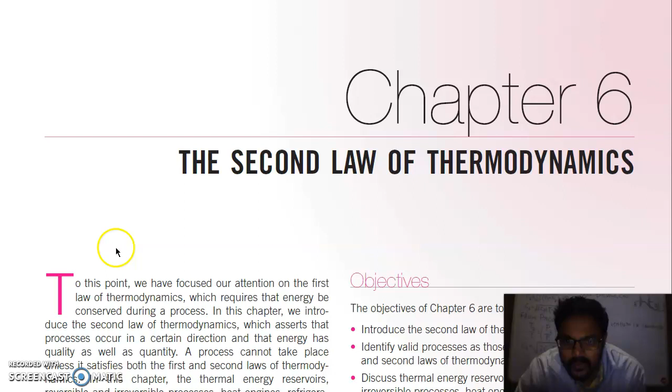The second law of thermodynamics, the Carnot principle of the second law of thermodynamics, puts limits on the operation of cyclic devices, as expressed by the Kelvin-Planck and Clausius statements. A heat engine cannot operate by exchanging heat with a single reservoir, and a refrigerator cannot operate without a net energy input from an external source.

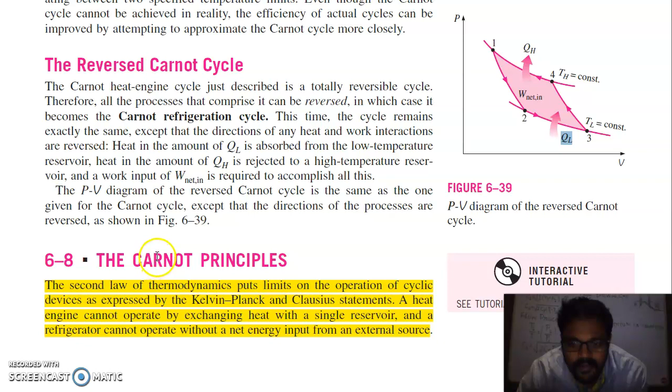We can draw valuable conclusions from these statements. Two conclusions pertain to the thermal efficiency of reversible and irreversible heat engines, and they are known as the Carnot principles. The Carnot principles are mentioned in the figure here.

So one process is irreversible, two processes are reversible, three processes are reversible, and according to these three processes, their respective thermal efficiencies are: thermal efficiency 1, thermal efficiency 2, thermal efficiency 3.

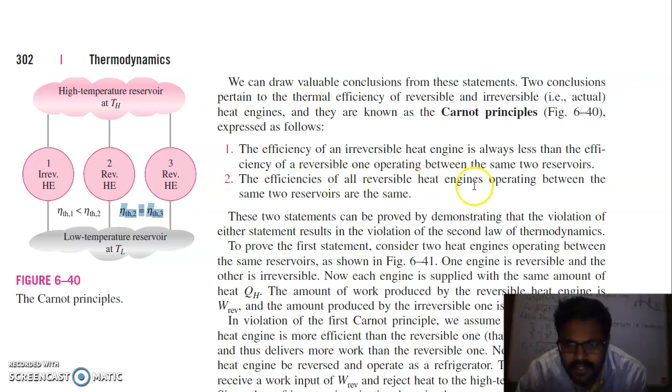Efficiency 1 means irreversible efficiency is always less than reversible efficiency, while if both 2 and 3 are reversible, their efficiency must be equal. The efficiency of an irreversible heat engine is always less than the efficiency of a reversible one operating between the same temperature limits. The efficiencies of all reversible heat engines operating between the same two reservoirs are the same.

These two statements can be proved by demonstrating that violation of either statement results in violation of the second law of thermodynamics. Now let us take the reverse of this.

We assume that the irreversible heat engine has more efficiency than the reversible heat engine. We assume, in violation of the first Carnot principle, that the irreversible heat engine is more efficient than the reversible one, and thus delivers more work than the reversible one.

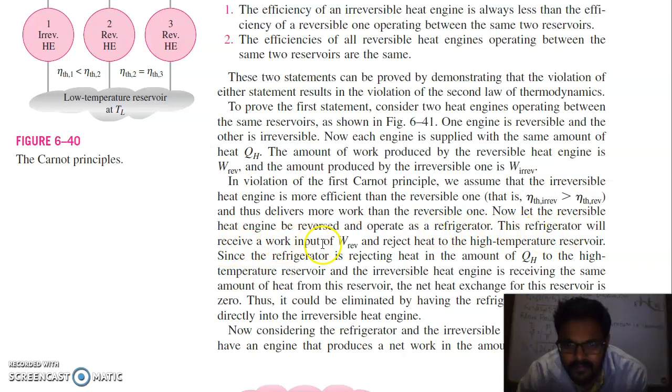Now let the reversible heat engine be reversed and operate as a refrigerator. This refrigerator will receive a work input of W reversible and reject heat to the high temperature reservoir.

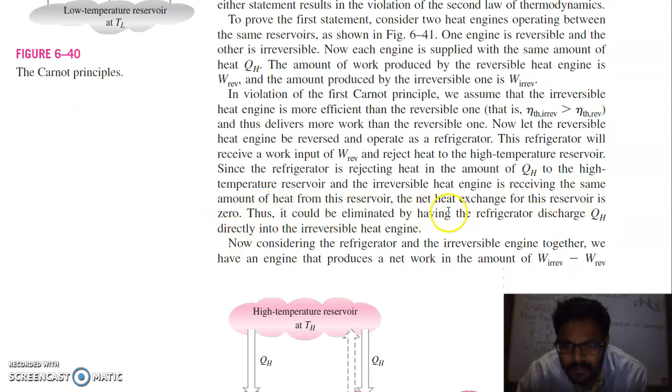Since the refrigerator is rejecting heat in the amount of QH to the high temperature reservoir, and the irreversible heat engine is receiving the same amount of heat from that reservoir, the net heat exchange for this reservoir is zero. Thus it could be eliminated by having the refrigerator discharge QH directly into the irreversible heat engine.

So what he is saying here is that we had a reversible and an irreversible heat engine operating between the same reservoirs. So we have a high temperature source and a low temperature source.

A reversible... an irreversible heat engine is operating whose work is W irreversible. It will lose QL irreversible amount of heat to the low reservoir.

Now we can take another heat engine, a reversible heat engine, which will take QH amount of heat. It will produce W reversible amount of work and it will reject QL to the reservoir.

So because it is a reversible heat engine, it can be reversed. So when this is reversed, it will act as a refrigerator.

It will take QL amount of heat from the reservoir and it will reject QH amount of heat to the high temperature reservoir. So it means now...

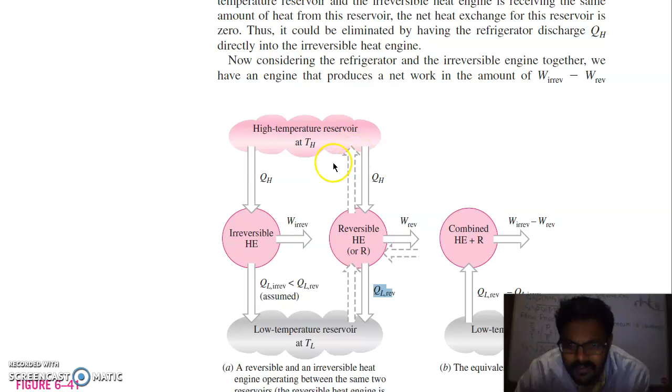Considering the refrigerator and irreversible engine together, we have an engine that produces a net work in the amount of W irreversible minus W reversible. This means you can combine the irreversible heat engine with the reversible heat engine or refrigerator.

When you combine these two, you get a combined heat engine plus refrigerator, because the refrigerator is supplying QH amount of heat to the reservoir, and this reservoir is supplying QH amount of heat to the irreversible heat engine. So you can eliminate this reservoir, since QH is supplied back and QH is taken.

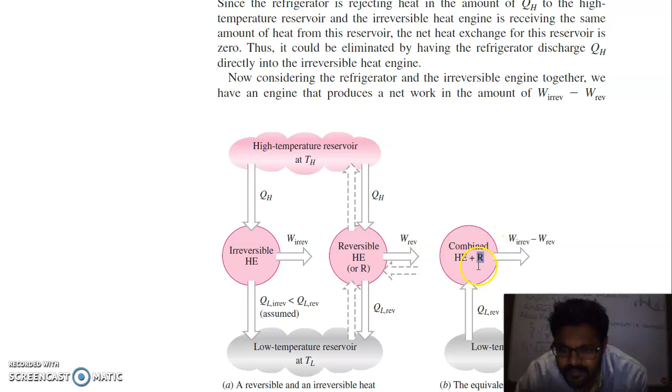So you can just eliminate it, since they can supply heat to each other. This refrigerator can supply this heat to the irreversible heat engine. So after combining the two, you get this combined heat engine plus refrigerator.

So after combining, you get this equation here: QL reversible minus QL irreversible, and W irreversible minus W reversible.

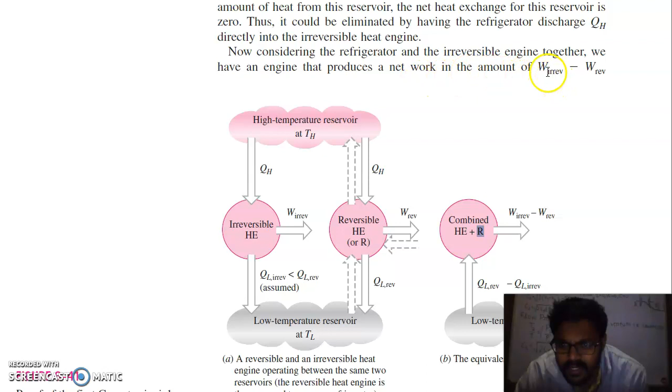Because we know, now considering the refrigerator and irreversible engine together, we have an engine that produces a net work in amount W irreversible minus W reversible while exchanging heat with a single reservoir, a violation of Kelvin-Planck statement of the second law.

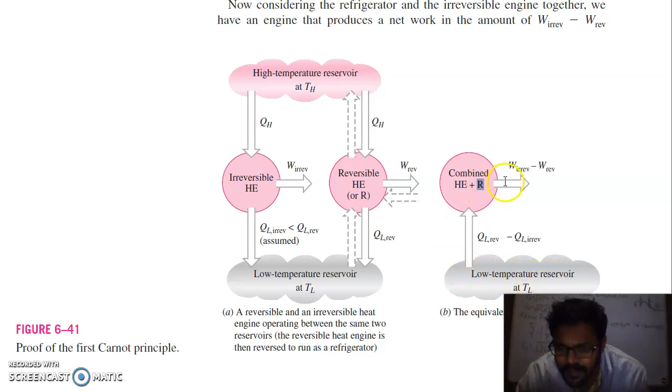This here is the violation of second law, meaning a refrigerator, this system is working just by taking heat from the low temperature reservoir and producing work. This is total violation of the Kelvin-Planck statement of second law.

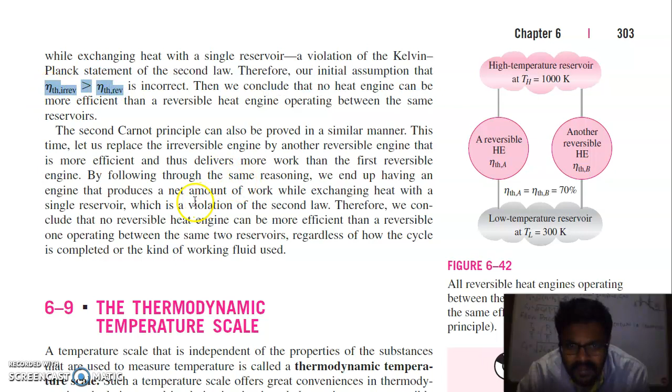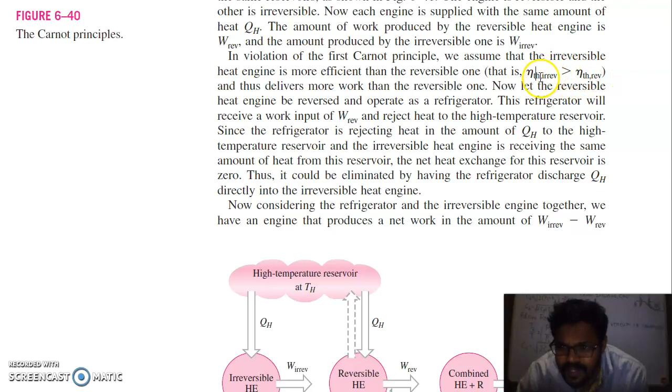Therefore our initial assumption that efficiency of irreversible is greater than efficiency of reversible is incorrect - this assumption which we had taken at the initial point is incorrect. If this is an incorrect assumption, it means the reverse of this is true, which means efficiency of a reversible engine is always greater than efficiency of an irreversible engine.

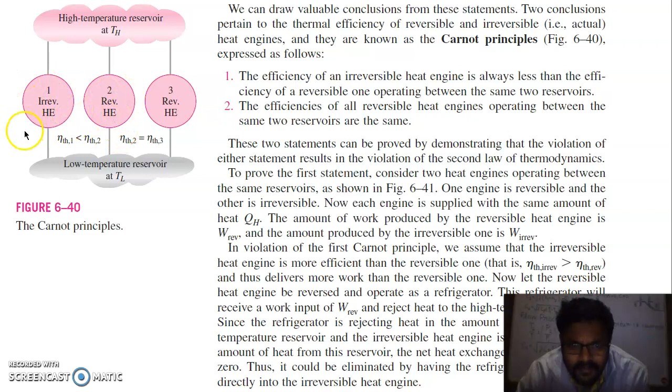This reversible engine has more efficiency as compared to an irreversible engine, and whatever efficiency is given by the reversible heat engine is the maximum efficiency you can obtain, meaning all reversible heat engines will have the same maximum amount of efficiency.

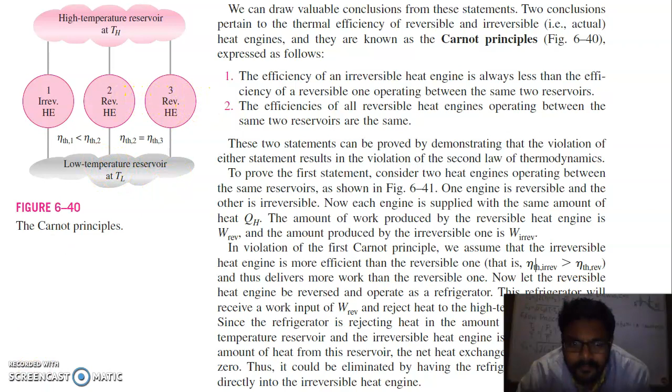Then we conclude that no heat engine can be more efficient than a reversible heat engine operating between the same reservoirs. The second Carnot principle can also be proved in a similar manner.

This time let us replace the irreversible engine with another reversible engine that is more efficient and thus delivers more work than the first reversible engine.

So you can see here we had two engines, a reversible heat engine and another reversible heat engine, and both have the same efficiency. All reversible heat engines operating between the same temperature reservoirs have the same efficiency.

By following the same reasoning, we end up having an engine that produces a net amount of work while exchanging heat with a single reservoir, which is a violation of the second law.

Therefore we conclude no reversible heat engine can be more efficient than a reversible one operating between the same temperature reservoirs, regardless of how the cycle is completed or the kind of working fluid used.

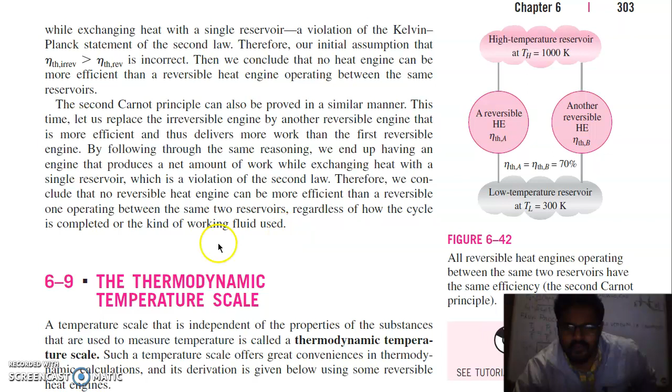The thermodynamic temperature scale is a temperature scale that is independent of the properties of the substance used to measure temperature.

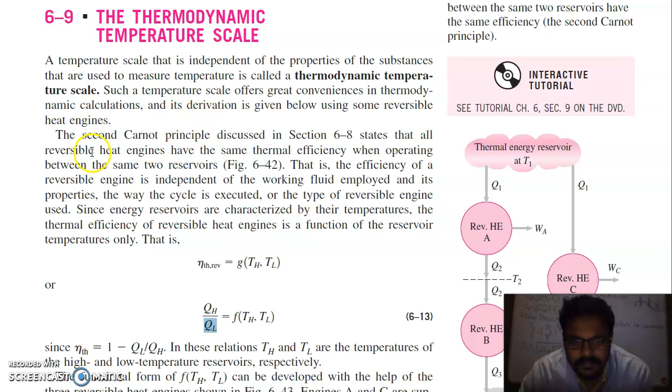Such a temperature scale offers great convenience in thermodynamic calculations. Its derivation is given below using some reversible heat engines.

The second Carnot principle discussed states that all reversible heat engines have the same thermal efficiency when operating between the same two reservoirs. That is, the efficiency of a reversible engine is independent of the working fluid employed and its properties, the way the cycle is executed, or the type of reversible engine used.

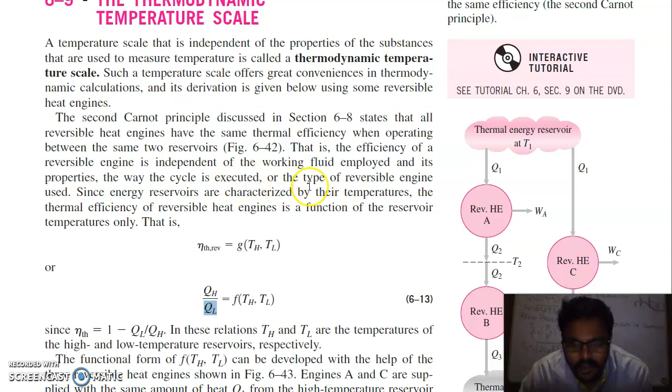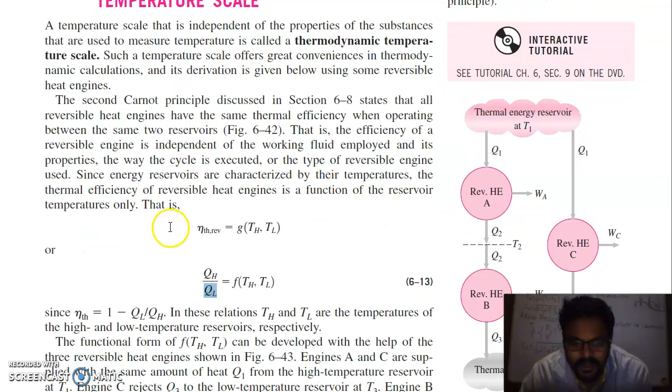Since energy reservoirs are characterized by their temperatures, the thermal efficiency of a reversible heat engine is a function of reservoir temperature only. So you can see here we have a thermal energy reservoir at temperature T1, and a thermal energy reservoir at low temperature T3. So we had two types of processes here, two types of heat engines.

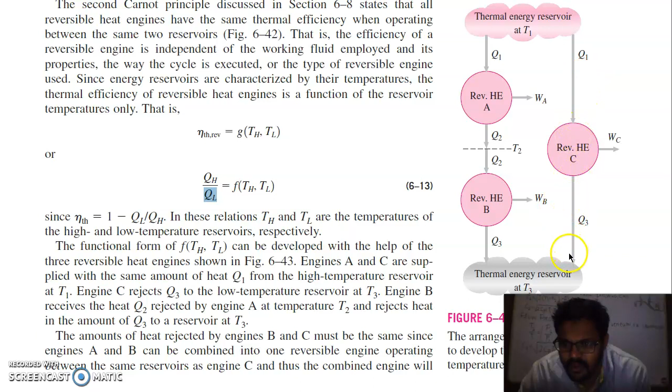One is taking Q1 heat, producing WA work, and rejecting Q2 heat, and then Q2 heat is supplied to engine B, which rejects Q3 heat. The second is a single engine which will take Q1 amount of heat and reject Q3 amount of heat, producing WC amount of work.

Now thermal efficiency is dependent on 1 minus lower temperature divided by higher temperature. In these relations, TH and TL are the temperatures of the high and low temperature reservoirs respectively. You can also say the efficiency is a function of higher temperature and lower temperature. So higher temperature and lower temperature, or QH and QL, is also a function of higher temperature and lower temperature.

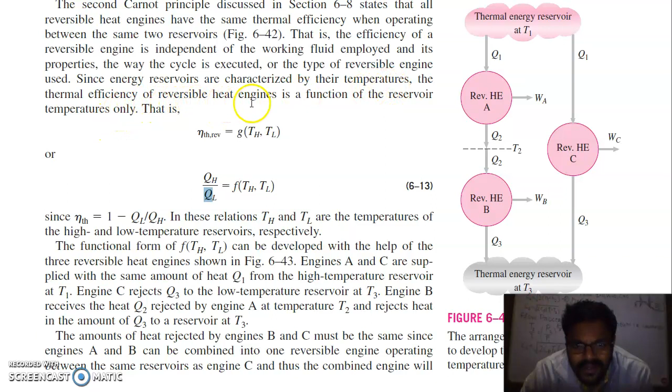So the efficiency of a reversible engine is independent of the working fluid employed and its properties, the way the cycle is executed, or the type of reversible engine used. Since energy reservoirs are characterized by their temperatures, the thermal efficiency of a reversible heat engine is a function of reservoir temperature only.

Now as we know this is a function of temperature, the functional form F(TH, TL) can be developed with the help of three reversible heat engines shown in this figure.

Engine A and C are supplied with the same amount of heat Q1 from the high temperature reservoir T1. Engine C rejects heat Q3 to the low temperature reservoir at T3. Engine B receives heat Q2 rejected by engine A at temperature T2 and rejects an amount Q3 to the reservoir at T3. The amounts of heat rejected by engine B and C must be the same.

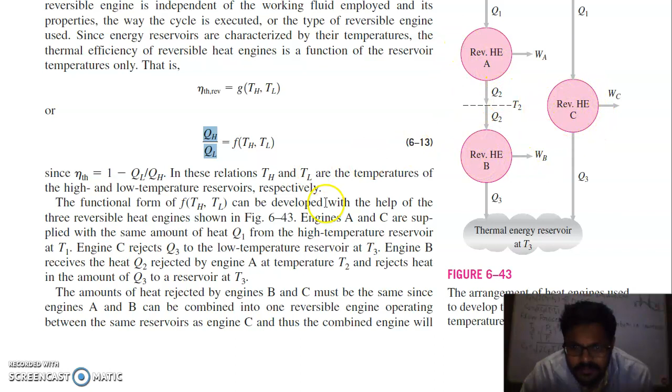This means A and B can be combined into one reversible engine operating between the same reservoirs as engine C. This A engine and B engine can be combined and are equivalent to this reversible heat engine, since the heat input to engine C is the same as the heat input to the combined engine AB.

Both systems must reject the same amount of heat. This means Q1/Q2 is a function of T1, T2; Q2/Q3 is a function of T2, T3; and Q1/Q3, which is for engine C, is a function of T1 and T3.

Now consider the identity: this equation Q1/Q3 can be written in this form. You can multiply and divide by Q2. Now this Q1/Q2 you can put here, and this Q2/Q3 you can put here.

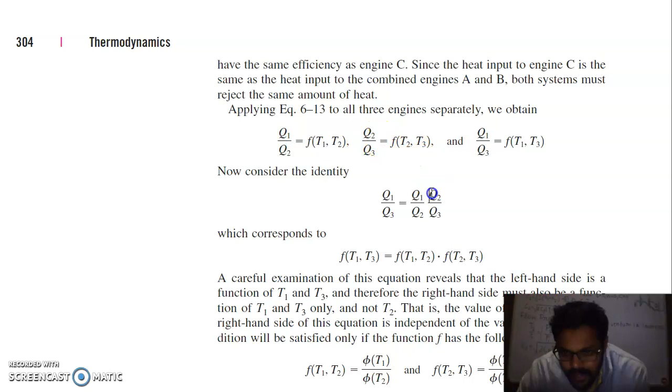The final result is: f(T1, T3) equals f(T1, T2) times f(T2, T3). We had this equation here.

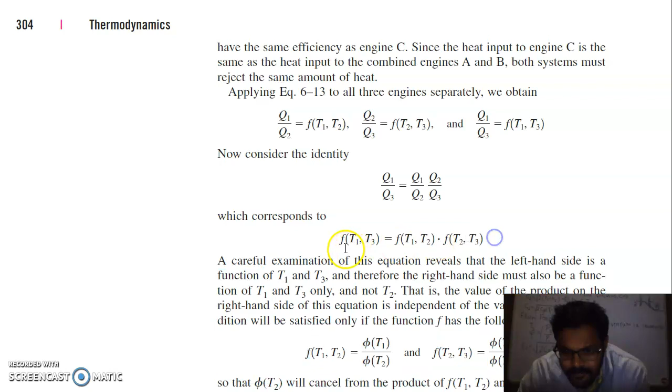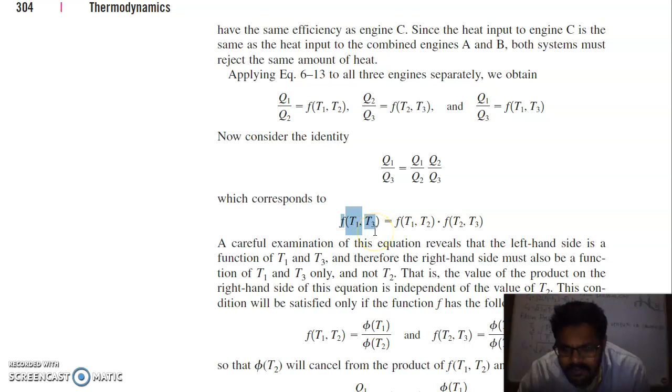A careful examination of this equation reveals that the left hand side is a function of T1, T3, and therefore the right hand side must also be a function of T1, T3. This means if this side is a function of the highest temperature T1 and lowest temperature T3, this side also must be a function of T1, T3.

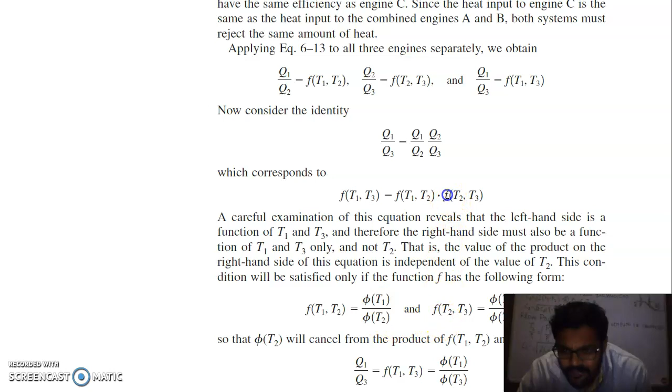This can only happen in one way: if f(T1, T2) is in the form of a fraction, a function of temperature divided by a function of temperature T2, and if f(T2, T3) is in this form, a function of T2 and T3.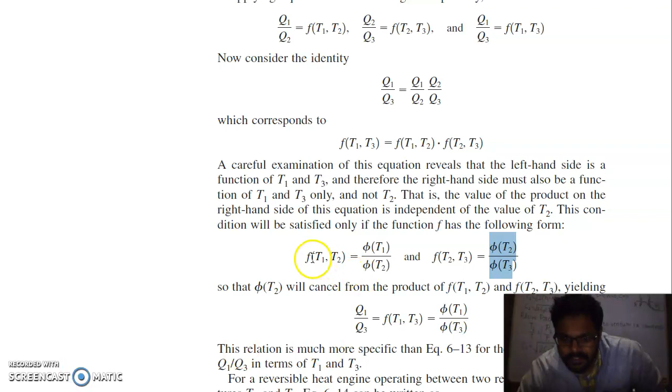So when you put these two equations here, you get the final equation, which is function of T1, T2 equals phi(T1)/phi(T2). So by putting these two values in this equation,

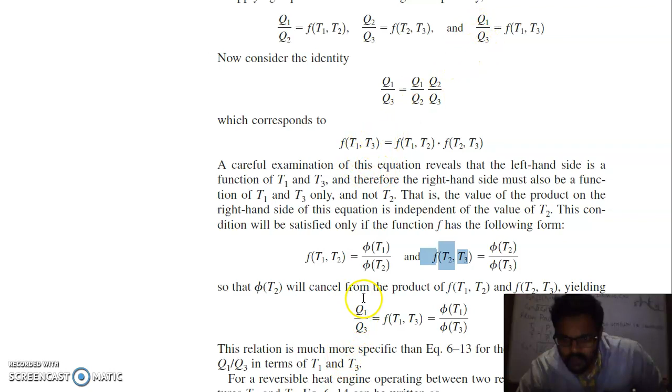and putting this value as Q1/Q3, you get Q1/Q3 equals a function of T1, T3. So this relation is much more specific for the functional form of Q1/Q3 in terms of T1, T3.

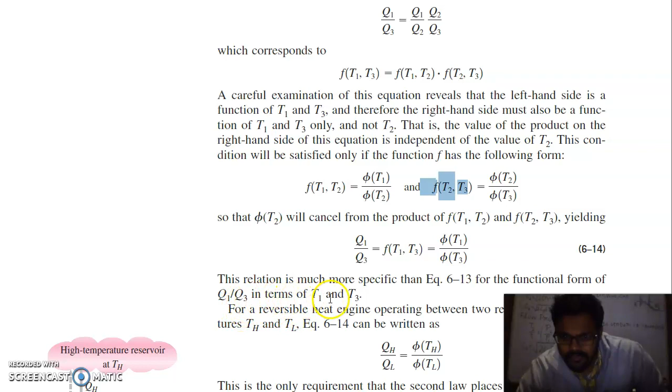For a reversible heat engine operating between two reservoirs at temperature TH and TL, this can be written as such—you can replace T1 by TH and T3 by TL, your two reservoirs, that is highest temperature and lowest temperature.

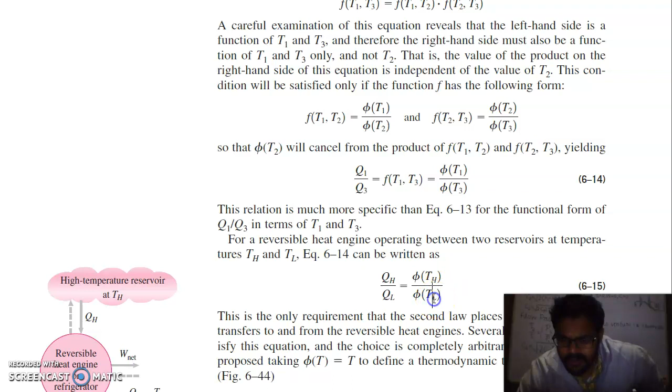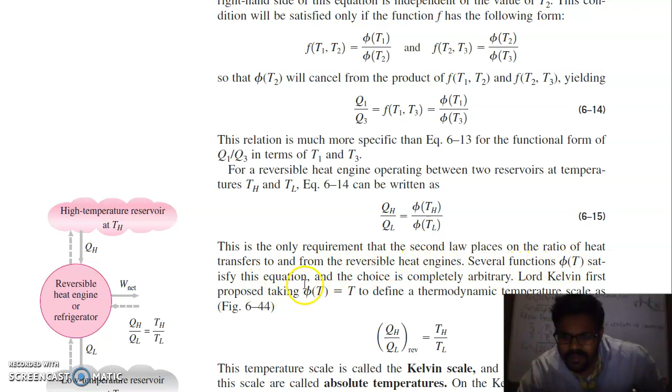So this is the only requirement that the second law places on the ratio of heat transfer to and from the reversible heat engine. Several functions satisfy this equation, and the choice is completely arbitrary.

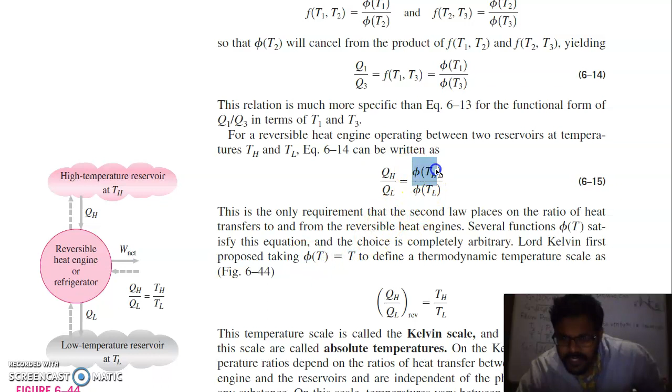Lord Kelvin first proposed taking phi(T) equal to T. He proposed that this phi(T) can be replaced with T. This forms the basis of the thermodynamic temperature scale, meaning QH/QL for a reversible cycle is equal to TH/TL.

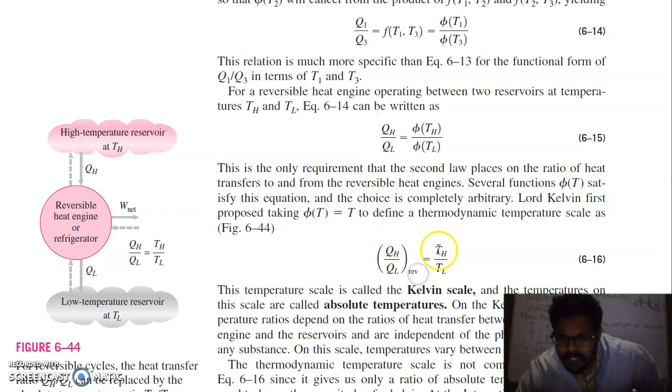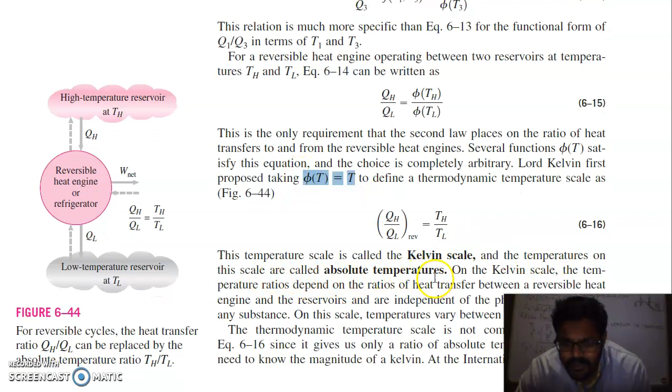This temperature scale is called the Kelvin scale, and the temperatures on this scale are called absolute temperature. On the Kelvin scale, the temperature ratios depend on ratios of heat transfer between a reversible heat engine and the reservoirs, and are independent of the physical properties of any substance. On this scale, temperature varies between 0 and infinity.

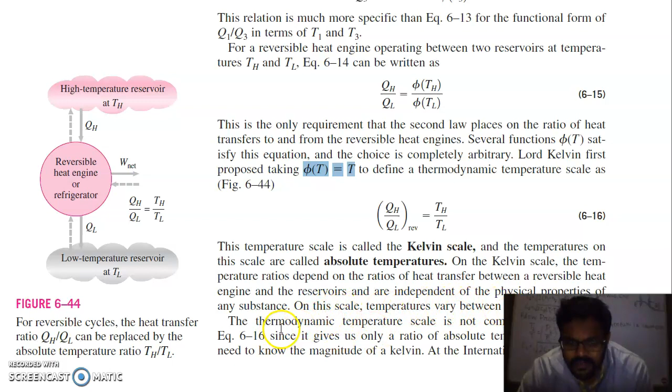So this is about the Carnot principle and the thermodynamic temperature scale.